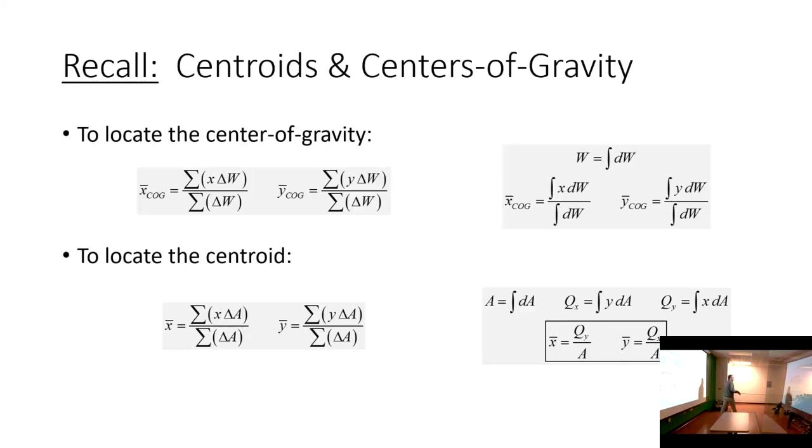So that's what we're going to be looking at today, is how to locate the centroid. And what we're actually going to focus on is our algebraic expression, not the calculus expression.

The reason why is because of this. More often than not, what we're able to do is take a complex region and split it up into discrete, what I would call classic shapes. In other words, I guarantee you, I probably could not go online and find a formula for the centroid of that shape. But I do know that I can find the formula for the centroid of a rectangle, or the centroid of a triangle, or the centroid of a circle, or what have you, or the areas and so on and so forth.

So just to make sure that everybody's kind of on the same page, we had a homework assignment where I wanted you to derive the location of the centroid of a triangle. Everybody should have gotten that done by now.

Now what we're going to be able to do is use those formulas to compute the centroid of more complex shapes. In other words, the idea is to take a shape and break it up into simple components. The good news is that there's actually probably more than one way to split this up into simple shapes, but in the end, done correctly, everybody will get the same location of the centroid.

The problem we're going to do today, I think it's pretty obvious how you would break it up. But you'll see how it doesn't really matter as you start going through some of these problems. You'll get the same answer across the board.

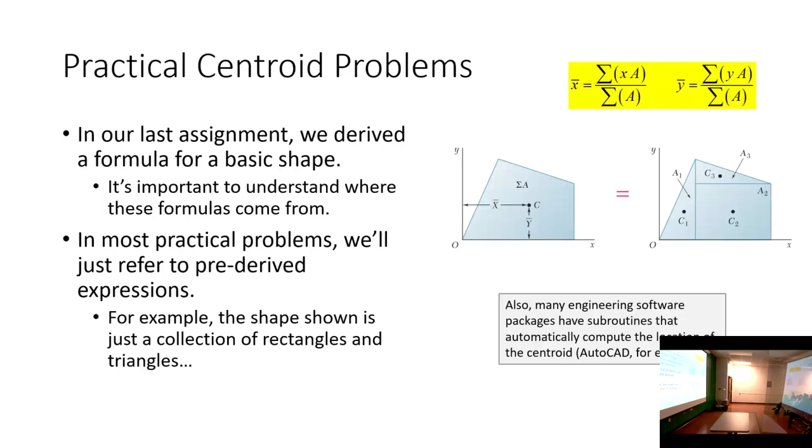Now, one of the things that is going to be required in order to compute the centroid of composite shapes, if you're referencing classic shapes, is just that, a centroid reference.

These are not things that I'm expecting you as engineers to memorize. Now, I'll level with you, there are a few of them that would be a good idea to have stuck in the back of your head. So, for instance, if you have a right triangle, the centroid is located 1/3 of the leg dimensions from the right angle. If you can sort of remember that, it's going to give you a little bit of an edge.

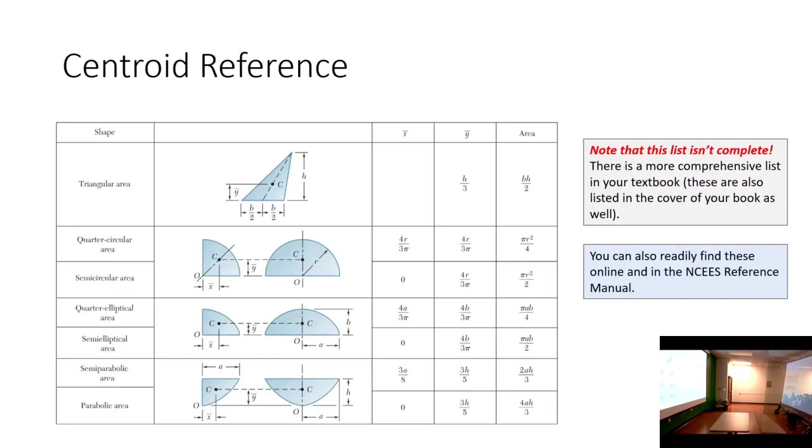Okay, I do think you ought to take some time and look at these. One of the things that's worth mentioning, if you are planning to take the FE exam, which hopefully everybody in this room is, the FE reference manual has centroids that are listed in the manual, very similar to this. The schematics and the formulas may be a little different, so it's worth a look before you take the exam, but they are present inside the reference manual.

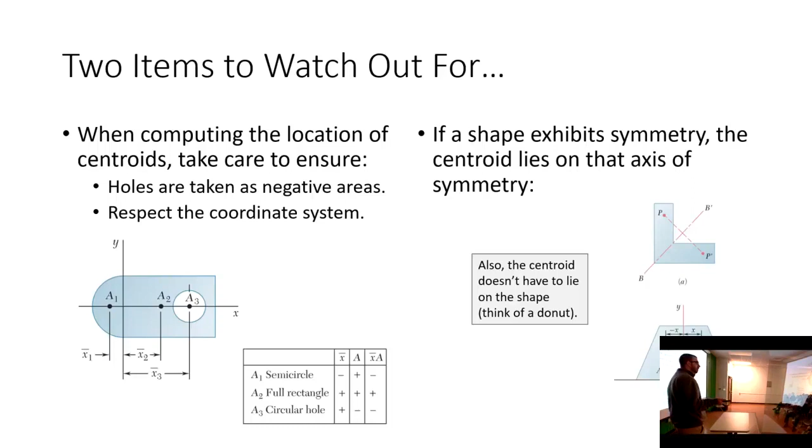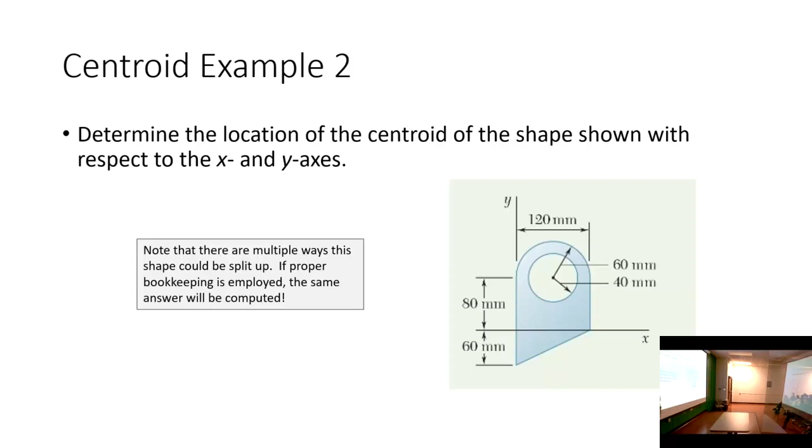That doesn't mean it's difficult. This is actually a pretty simple problem. It's just rote. It requires a little bit of process. Also, if you're fans of Microsoft Excel, Excel can make your life a little easier during the computation.

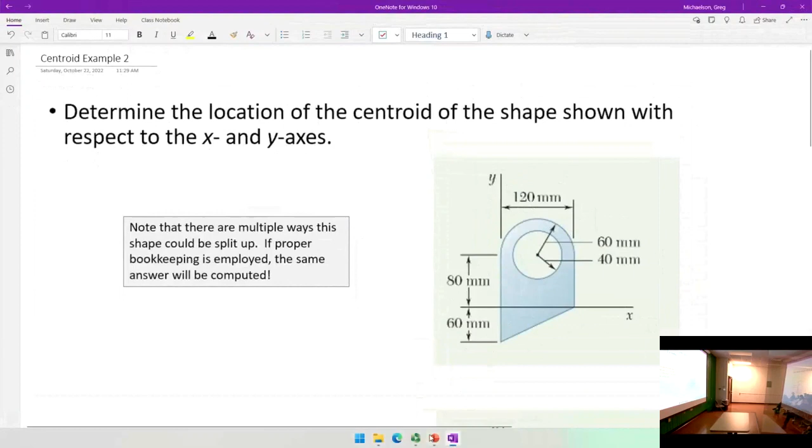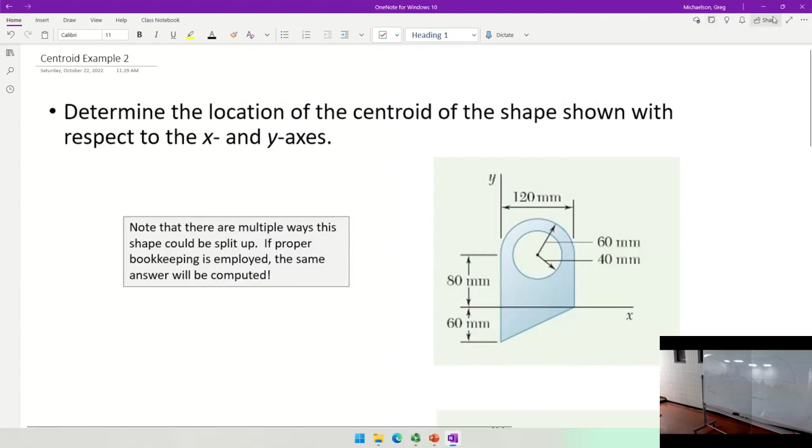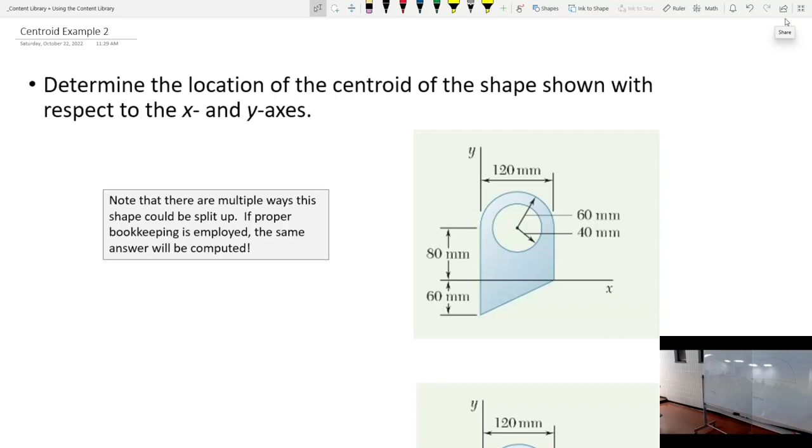So what we're going to do is we're going to determine the location of the centroid of this shape shown. The way I'm going to handle this is I'm going to split this up into a series of simple shapes. In order to do this, I want to do this in such a fashion that we're all doing it the same way. So here's how I'm going to do it. I want to be clear, there's no magic way of splitting it up or ordering it. This is just the way that I've decided.

So that we're all doing it in the same order, okay? So we'll say splitting up.

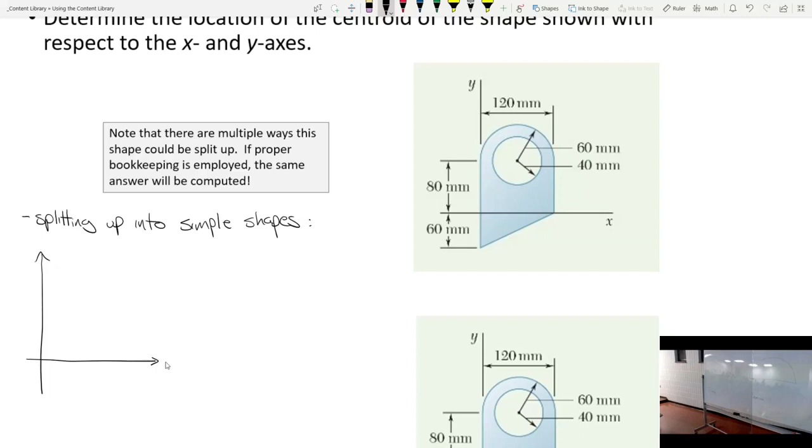Into simple shapes, okay? So what I'm going to do is, here's my region. Then I'm going to draw another region over here, another coordinate system over here, and you'll see why. Let's do that as a dotted line.

So what I'm going to do is I'm going to deal with this shape. I'm going to look at 4 different shapes. So I'm going to have a solid rectangle, a solid semicircle, a solid triangle. I'm going to number these shapes 1, 2, and 3.

But then I'm also going to have a hole in the cross section. So I'm going to have a hole right here, and maybe what we'll call that 4. And we'll sort of hatch that in a little bit. In other words, here's the shape, and then I'm subtracting from that this hole.

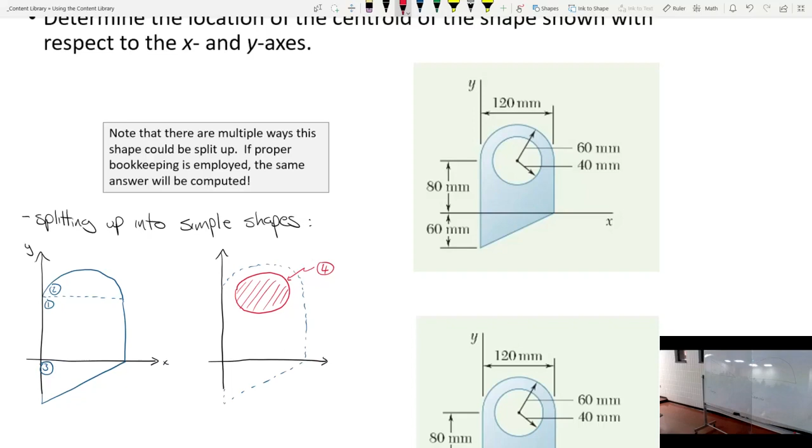I'm just starting off with something that's pretty basic. So I copied the schematic over here because I wanted to be able to reference this as we go through the problem. I don't want to have to keep scrolling up and down, so I copied the image over here. So let's start off with the rectangle. We'll call this shape 1.

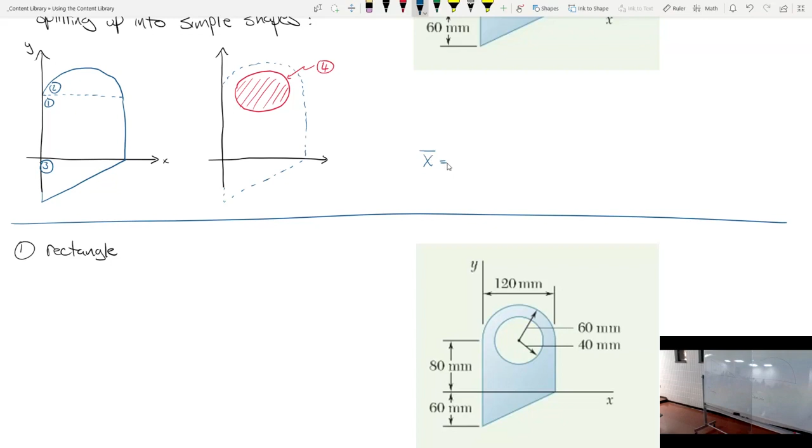Rectangle. Now, to be clear, ultimately what we're trying to do is compute that weighted average location of the centroid, which is the sum of XA divided by the sum of A, comma, and the same thing for the Y bar. Very similar to what we did from an integral standpoint. With integrals, we were integrating x dA and integrating dA. Now we're just summing them up, so instead of an integral formulation, we're using a summation formulation.

If you want, those are our governing equations that we're utilizing. So let's start off with the area. If I'm looking at this rectangle, this should be pretty simple. How do I compute the area of this rectangle? What is the area? 120 times 80, right? Pretty straightforward. So 120 times 80, we'll call that BH.

I think I can do that one in my head. Is that a fair statement? So far, so good? Okay, now we got to pay attention.

Okay, so what I want is an X coordinate and a Y coordinate. Let's look up here. Would you agree that, barring my horrible art skills, the center of that rectangle, or the centroid, is about right there? So what are the coordinates of this point? That's the origin. How do I get from the origin, which is right here, over to that point? Along the x-axis, tell me what calculation I need to do. B divided by 2. I need to take this divided by 2, and then along the y-axis, I need to take that divided by 2.

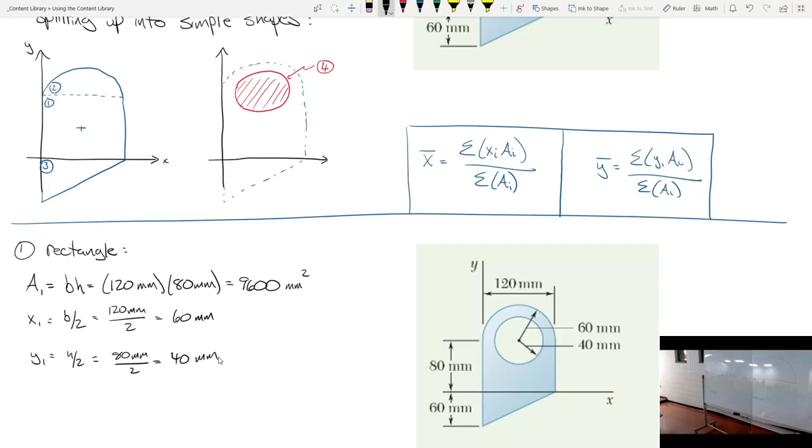So the next shape that we're going to look at is this semicircle, shape 2. Let's scroll down here a little bit, and I'm going to get this out of the way because I'll be looking at that here in a bit. But let's look at shape 2, this semicircle.

Okay, so let's look at this semicircle. So what we're talking about is that region right there. Because remember, what we're going to do is we have this solid rectangle, this solid semicircle, solid triangle, and then we're going to remove the hole from it. So for now, let's just treat it all as one solid shape.

So first off, help me out. How do we find the area? How do we find the area of that semicircle? Well, how do you find the area of a circle?

Pi r squared. So what's the radius of that circle? 60. That's another thing, make sure you're reading the schematics appropriately, right? So this semicircle has a radius of 60. But if the area of a circle is pi r squared, the area of a semicircle is pi r squared divided by 2.

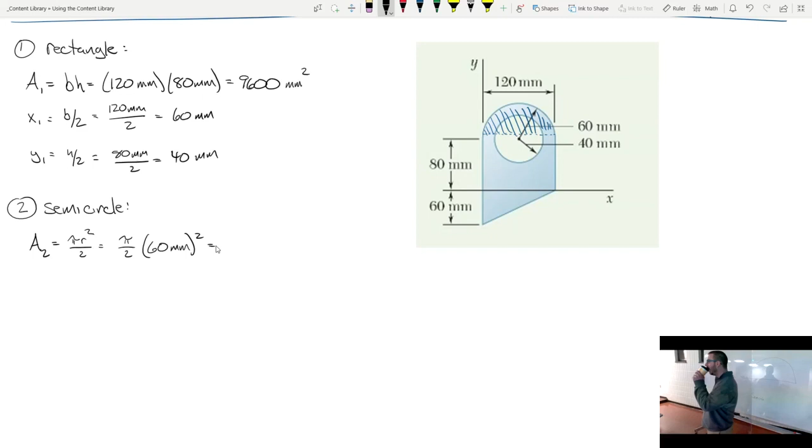Who's got a Casio FX 115 ES Plus or similar scientific calculator with them? Yes, I'm going to make you do some calculations this morning. It's not that cold outside. We'll say 2 decimal places to make sure everybody's on the same page. Anybody got an answer? Come on.

5,654 -- there we go, 5654.87 millimeters squared. Do I have a second on that? Alright, just get ready because I'm going to ask for a few of those here in a little bit. And she's good for the day, it means somebody else is going to answer the next one.

So let's talk about X2 and Y2. Let's again make sure we understand what these are. These are the distances from our origin, our defined coordinate system, to the center of each one of these shapes. Now, if I was looking at this semicircle, I'd say we're probably looking at about somewhere like that. That's about where the centroid is.

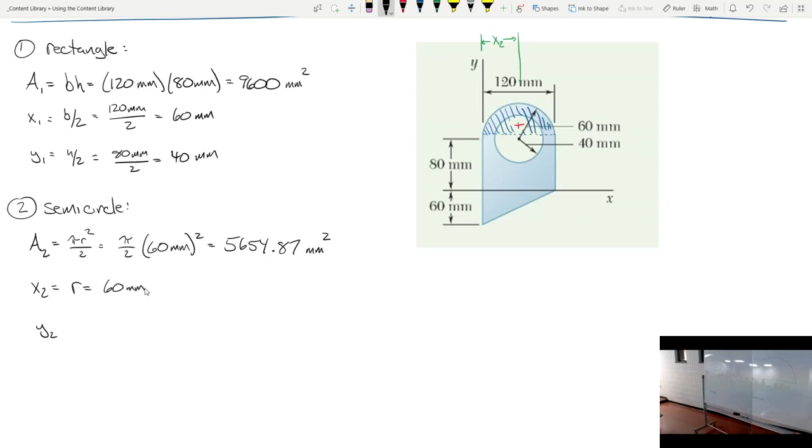This is a semicircle. This is one of those things I don't expect you to just sort of remember, okay? And this might be the very first day you've ever seen this formula before. I'm curious about that, we'll see here in a sec. But let's go down to our centroid reference. So this is our centroid reference. I only copied the sections that mattered, okay?

So we're looking at a semicircular area, looking at this distance right here. What these guides give you is the centroid with respect to a given point. Notice it's not telling you where the centroid is left and right, because you know it's along the line of symmetry, but it is telling you what this distance is. This distance right here, and it is saying that distance is 4r over 3 pi. So if I have a semicircle and I want to find the centroid, I know that distance is 4r over 3 pi, okay? Okay, with me so far?

Now, where did they come up with that? You should know the answer because that's what we did on homework 5.1, right? On homework 5.1, you were deriving the centroid for this. It's just the same process, just a different shape, okay?

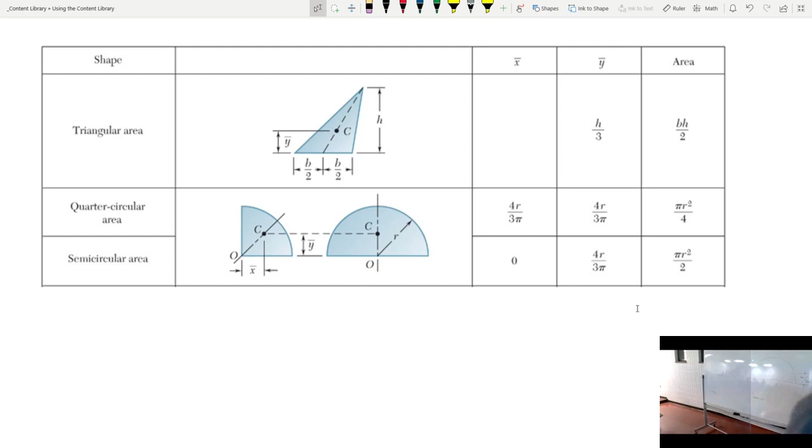So far, so good? Now, does that mean that we do this? Is that right? No, it is not, okay? Why is that?

Back to your schematic. This dimension right here is 4r over 3 pi. That's what this dimension is. That's not what I'm asking for. I'm asking for how far it is from the origin to that point. So if I just put 4r over 3 pi, that's wrong. What am I missing? I'm missing another 80 millimeters. That's the issue, okay?

By and far, one of the biggest mistakes made in centroid land is to just look up the formula and use it without recognizing that you need to express those distances with respect to your chosen coordinate system. That's what I meant when I said respect your coordinate system. Make sense? All right, so now let's do this calculation, okay?

So 4r over 3 pi. And now what do we got? 105.47. Do I have a second on that? Okay.

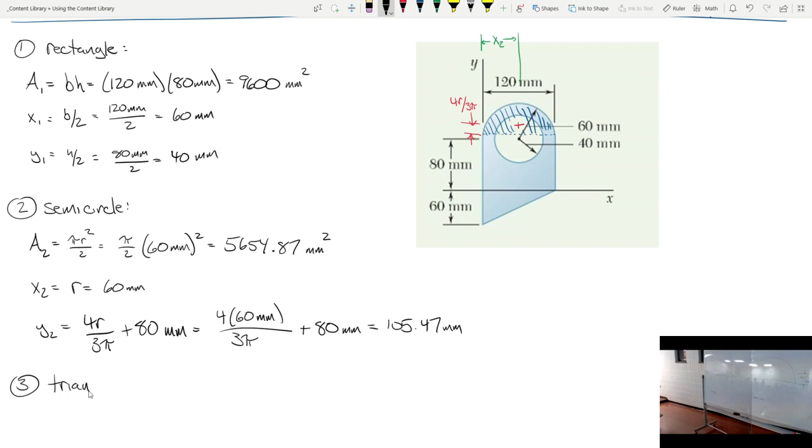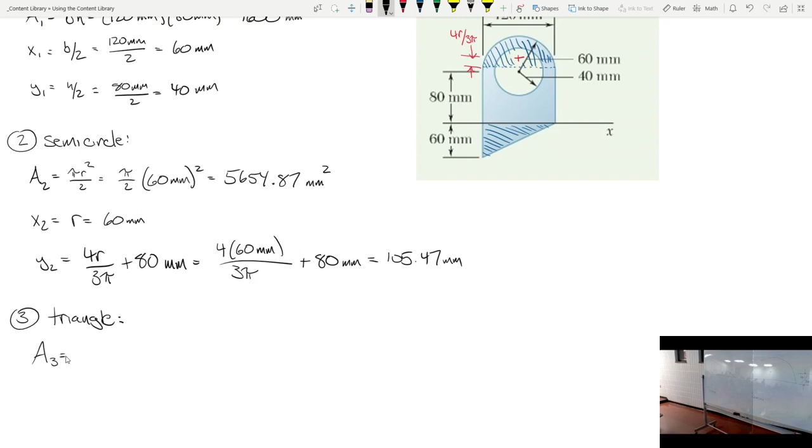Now let's look at our triangle. Okay. So we're looking at this shaded region right here. All right, the shaded region here. Okay, so how do we compute the area? Let me scroll up just a tad so you can see that one dimension.

What is the area of this triangle? 60 times 120 divided by 2. There you go. 120 over 2 is 60. 60 squared is 3,600. I knew that one in my head. Okay?

Now, let's do our X and Y. I'll put them right here. Okay, now let's see if you all remember, without scrolling, what was our answer from the homework assignment? If this dimension here is B, what is this dimension?

How did the homework go? Was it tough? There we go, B over 3.

And if this dimension is H, this dimension is H over 3. Okay? That one's one I would kind of like remember. Okay? That's going to show up a lot in engineering land. So being able to locate the centroid of a triangle, I'm not saying you need to memorize centroid references, but that one I'd kind of memorize. That one just shows up a lot.

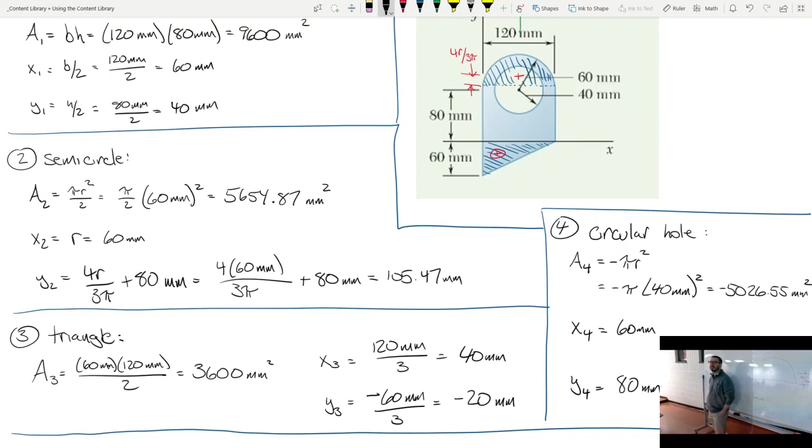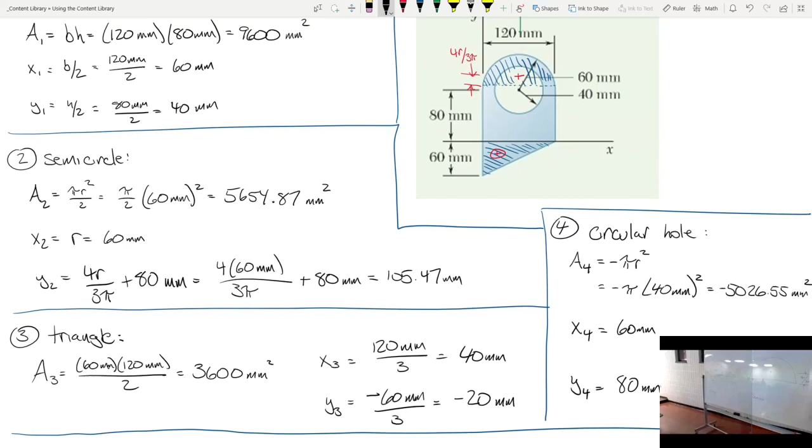All right, any questions so far? Okay, remember this is our governing setup that we're using. We have the area of each shape, we have the x coordinate of each shape, we have the y coordinate of each shape. The only thing left to do is this.

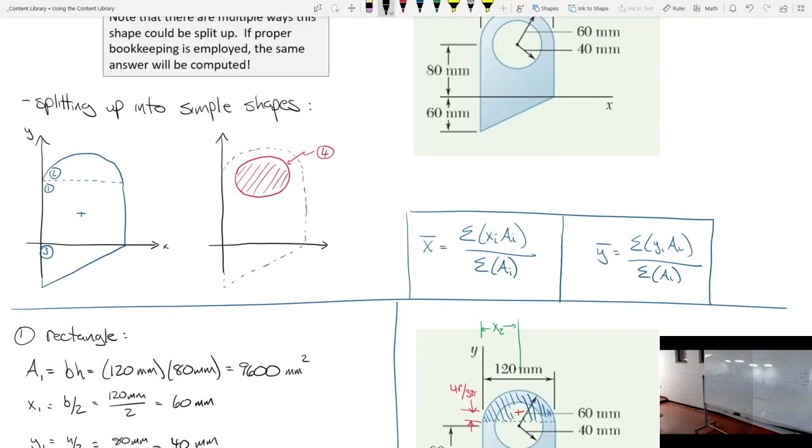Now, just about every engineer worth their salt that does this problem for a shape like this will do it with a table. So I'm going to draw myself a somewhat big table.

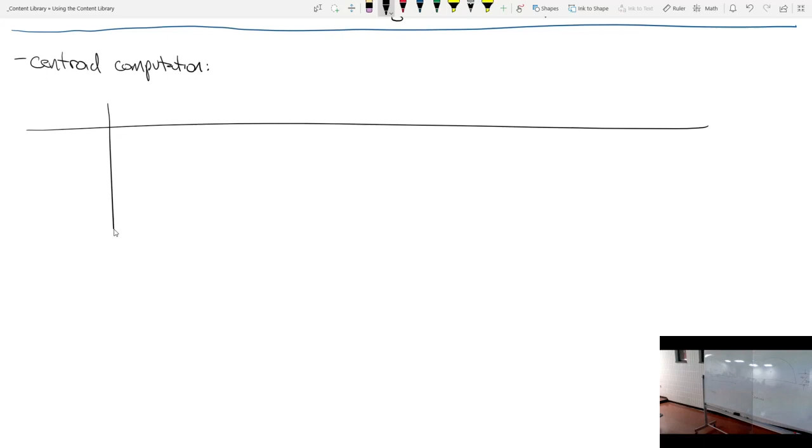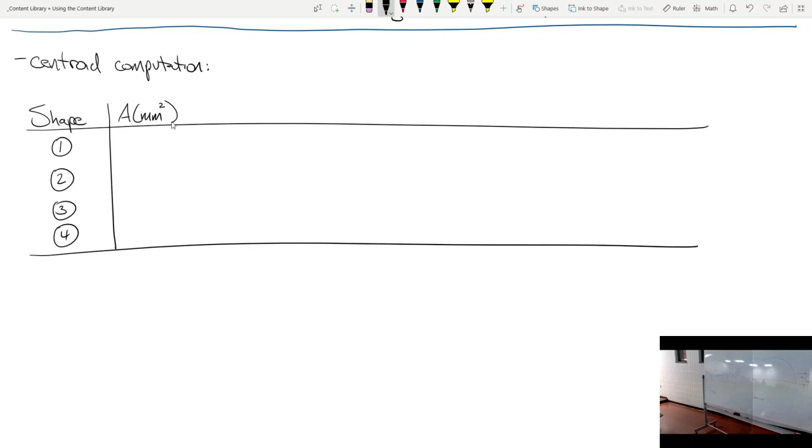So I'm going to list each of my shapes. First thing I'm going to list are the areas. And instead of writing the units over and over again, I'm just going to write them like this. So what do we have? We have the area.

9,600 for the rectangle. The semicircle, we got 5654.87. The triangle, 3,600. But then the circular hole, don't forget we got a negative, 5026.55.

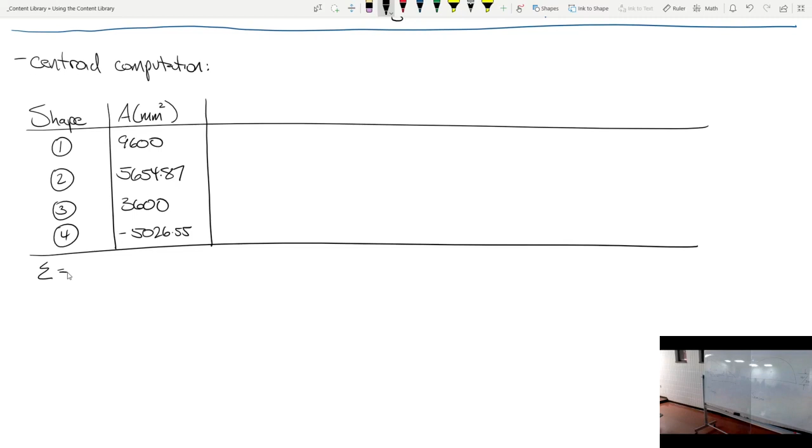Now, down below, I'm going to put here a summation. So if I sum these four values, what do I get? Again, making you break out that Casio FX 115 ES Plus. Have a second on that?

Okay, now what I'm going to do is list the x values. I'm going to list the y values later, let's just do it one at a time, let's do the x values first. So for the rectangle, it was 60. For the semicircle, this was 60. For the triangle, this was 40. And for the circular hole, this was 60.

All right, now what I'm going to do is compute this. Remember that our formula is the sum of x times A divided by the sum of A. So what that means is for each one of these, I need to take the area times its moment arm. Area times its moment arm. That's exactly what you're doing when you're integrating, right? You're integrating x dA, so each one of those little rectangles times the moment arm, and you're summing it up. So that's exactly what we're doing.

So we need 9,600 times 60. What is 9,600 times 60? It's going to be a big number. We're dealing in millimeters, so when you're dealing in millimeters, the numbers get kind of big.

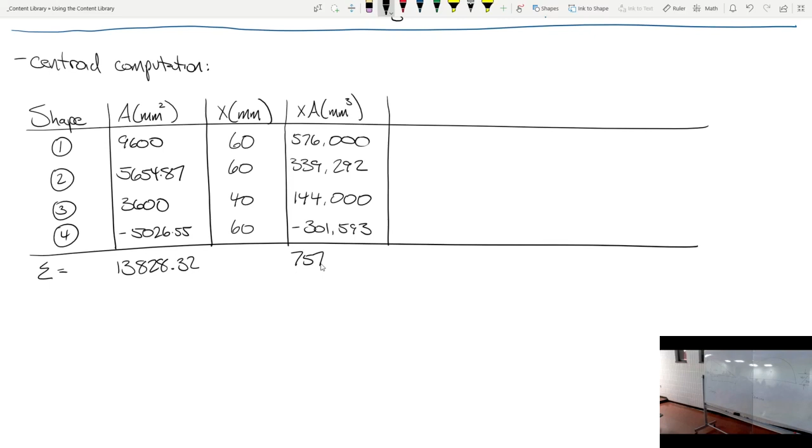So this I'm going to sum up. All right? Now, if you trust me, I'm getting this: 757,699.

So I propose then that therefore X bar is the sum of X times A divided by the sum of A, which is 757,699 millimeters to the third divided by that.

And what do you get when you chug that out? Not letting you completely off the hook. Letting her off the hook. She's already done one, I know she's good. So somebody else. No, I've got some answers over here. So it's not that huge.

We'll say 2 decimal places. 54.79 millimeters. So I have a second on that.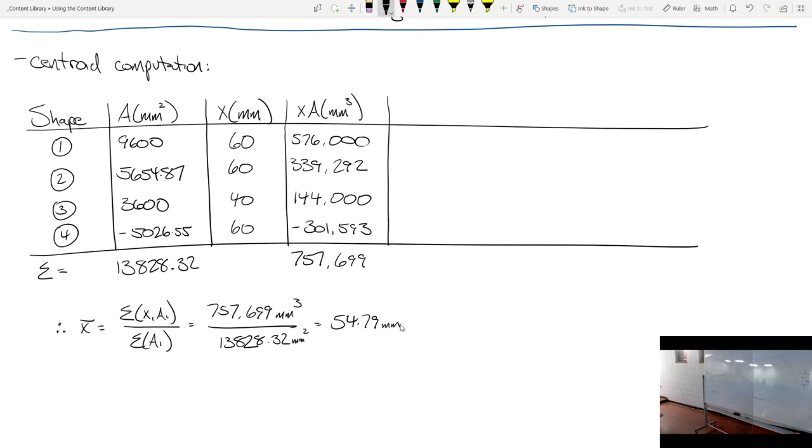Good deal. All right, so let's do the Y bar one, and then let's take stock of our answer and see if our answer made sense. So, what do we get for Y? And am I writing big enough that everybody can read my handwriting? I always like to check on that.

Okay, so for the rectangle, I think this was 40. For the semicircle, it was like 105.46 or 47, I don't remember which one it was... 46. Oh, okay, this one was negative, this one was positive. But we got to be careful because remember our areas as well, so this is going to be positive, positive, negative, negative.

So I'll help you out with these. This is Y times A. So just to make sure we're all clear on what we're doing, we're taking area times that, area times that, area times that — we're multiplying those terms. So this first one I can do.

So 96 times 4, 9 is 36, 24, so 384. This one's just messy. This one's straightforward: 3,600 times 20, so 36 times 2 is 72, another 0, negative 72,000. And this one's also negative.

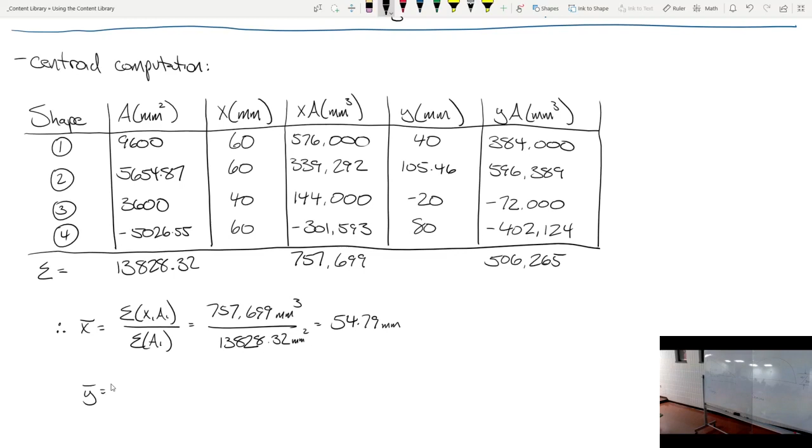So now I can do a Y bar computation. Let me scroll down a little bit so I don't have to squunch down when I write. Sum of Y times A, so now we have 506... and when you check that out, I'll go ahead and give you that one: you get 36.61.

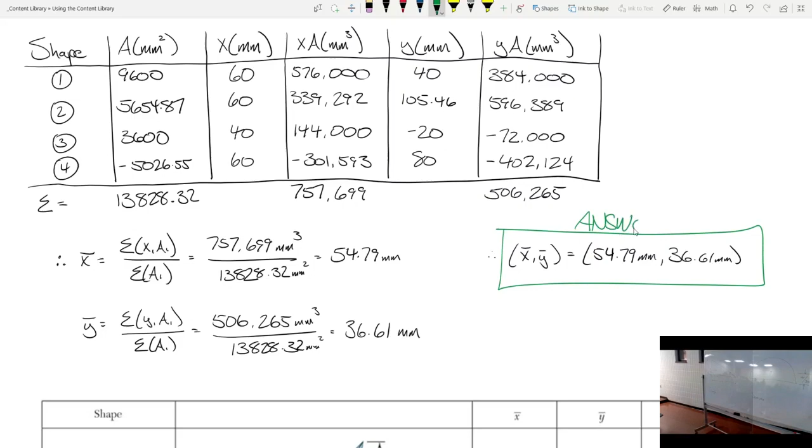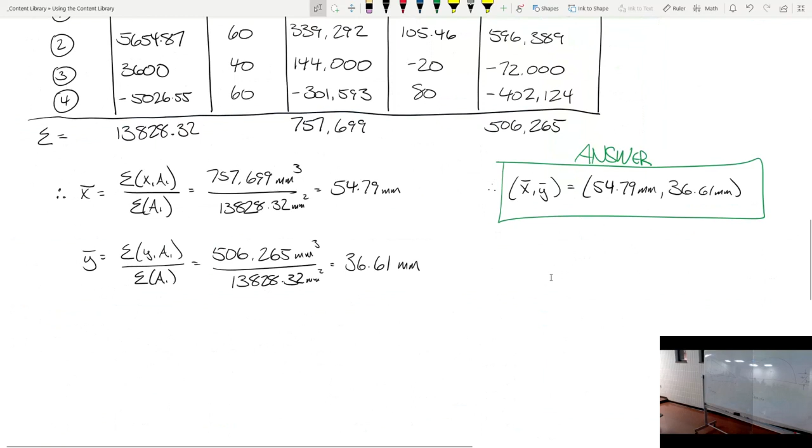So that's the location of our centroid, okay? So those coordinates are... and then I want to go back to the schematic and see if this answer makes sense. But I want to go back to this schematic real quick. Give me 1 second, sorry. Drag that down.

So I can idealize the weight of that shape or that area as a single vector right there, okay? Let me stop for a second, see if this makes sense.

Most important thing, I'd say the most common mistake I've seen — I'm saying this right now to everybody in this class, I guarantee you somebody will probably still make this mistake on the third exam — when this says 4r over 3 pi, it doesn't mean that you plug in 4r over 3 pi in the table. It's referenced from the datum, from your specified coordinate system. So make sure that whatever x and y values you use, they're referenced from a common origin, not just plugging and chugging what the table said. Because if you do, it'll be wrong, the answer will be wrong. Does that make sense?